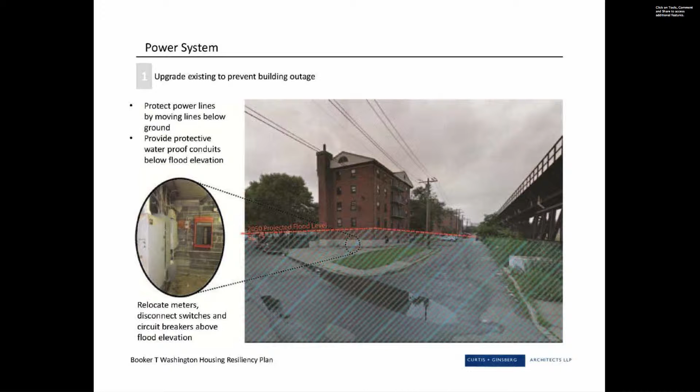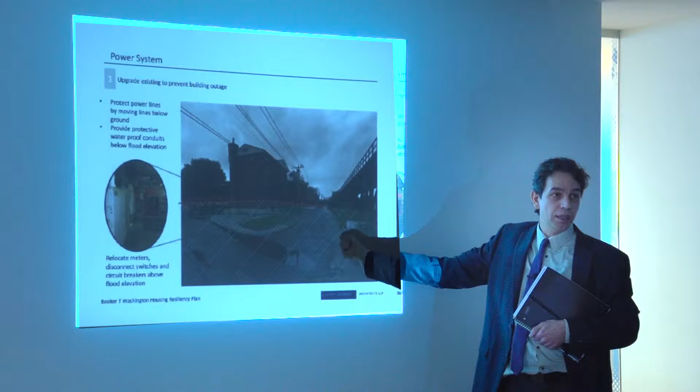One of the biggest issues at Booker T. Washington was they lost power for 10 days after Sandy. And what you have is food that's rotting, you have medical supplies that need to be refrigerated, there's no power for that, and security.

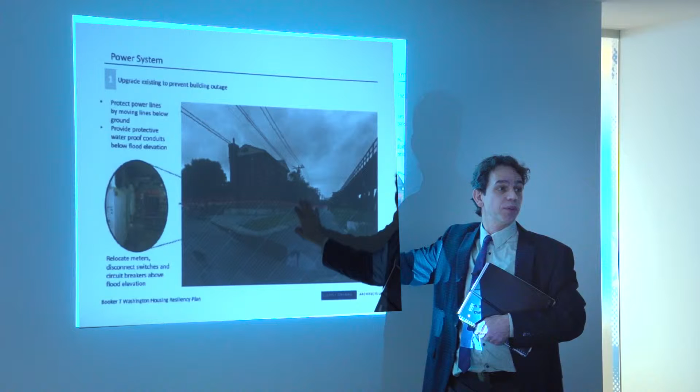So again, looking at mechanical systems, Jersey City already has a plan for elevating a lot of the boiler systems up to higher levels of the buildings. They're in the progress of doing that. So all that needs to be elevated.

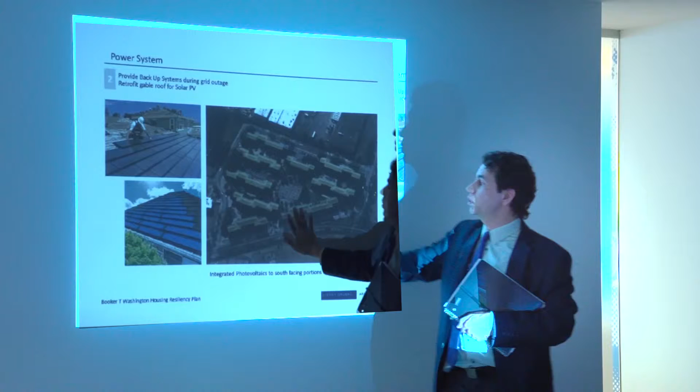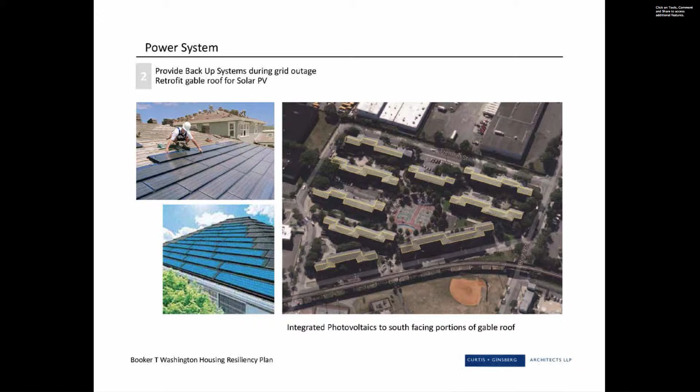One thing that we think could really work very well here is to put solar power on the roofs of the buildings. The power can be leased back to the power company during regular events, so it actually could be fairly revenue beneficial, or at least not a big cost.

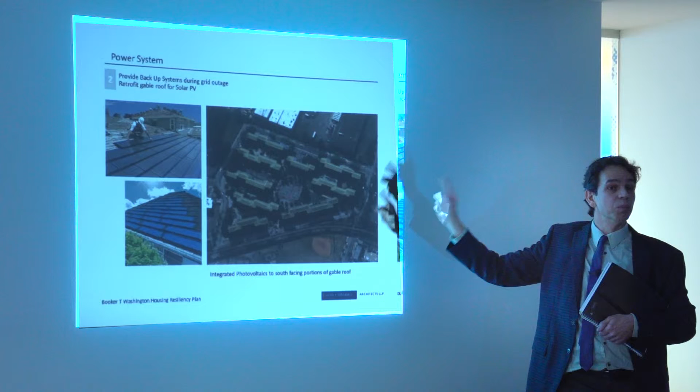But during major events, this could serve emergency power to supply emergency lighting, pumping systems to pump water out of the cisterns, and also to power a few refrigerators so that medical supplies stay intact if need be, and some food.

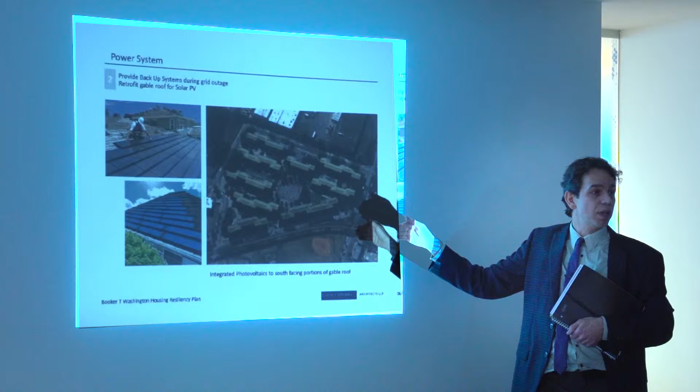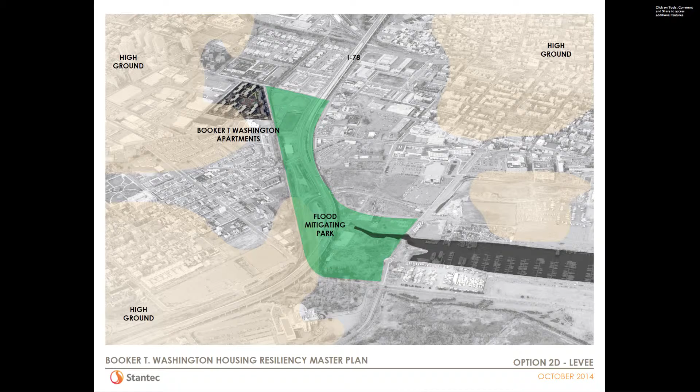So backing up again, if we want to look at larger scale solutions, we did notice that there is this big stretch of land between Booker T. Washington and the Morris Canal that is fairly underutilized. There's a lot of infrastructure that's elevated above it.

There's some brownfields. But we could deal with stormwater for all of these communities by creating a park that is designed to capture stormwater. And then on a massive scale, relieve pressure of the combined sewers, not just for Booker T. Washington, but relieve pressure that is building up in this entire community on the combined sewer system.

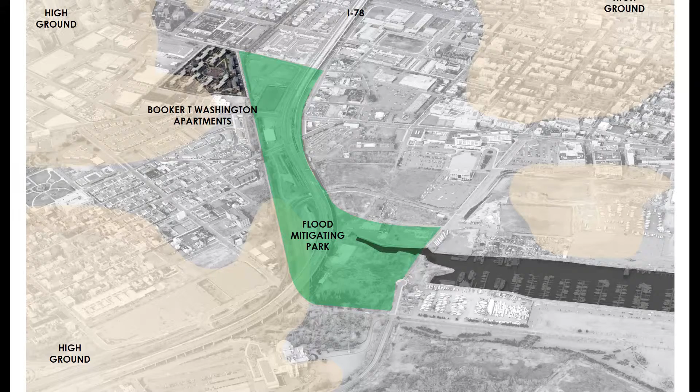Another bigger picture strategy is to look at this levee system that's out here at the Morris Canal. Here again, we've just done a very quick concept sketch where a levee could tie together these two higher pieces of ground. It could look like a rolling hill.

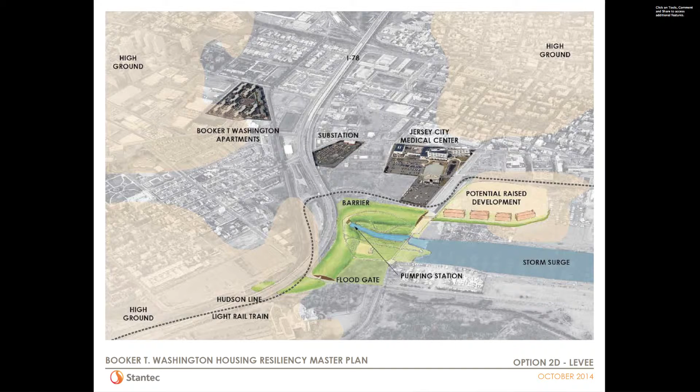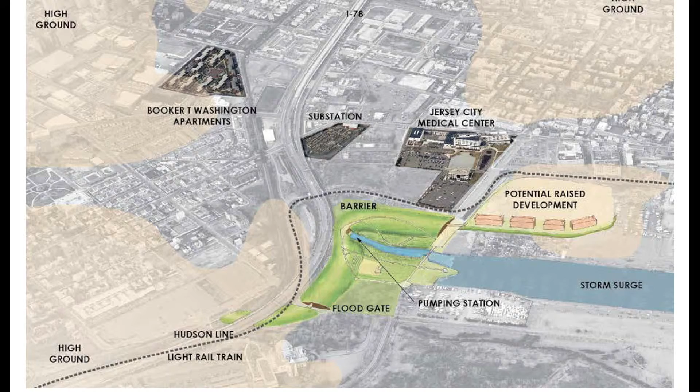So it really could become part of the city's park system. It doesn't have to look like a wall. Again, it has multiple purposes. It won't look like it's just about keeping water out. You'll be able to walk on it.

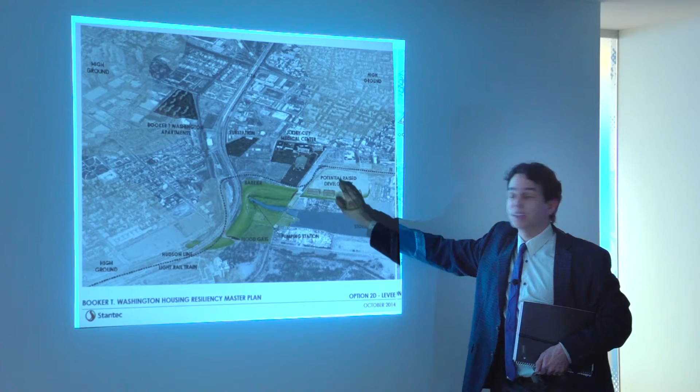It needs to be about 16 feet tall, we believe. And again, it protects the medical center, the substation, Booker T. Washington. We believe a portion of it could be private development. That could be new private development, and the private development could help fund construction of the barrier, the elevated land underneath. So a portion of this levee could be privately funded.

And again, it might have a couple of floodgates.